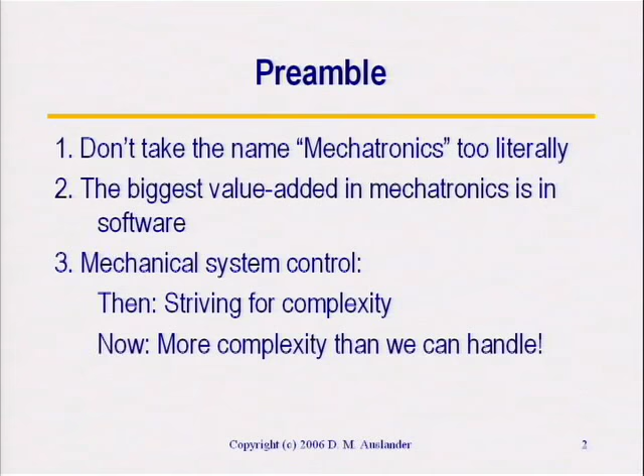So the general theme here is that the value added in mechatronics today is really software. And that's what I'd like to focus on.

If we look at mechanical system control, and I'll give a little history in a moment, in the past the issue was how do you build complexity into mechanical systems. If you look at the present, the issue is how do we manage the complexity we have. So we've gone from scarcity, in some sense, to too much, and that's really the whole issue of how to deal with mechanical systems.

So there's been a long history. Complexity has been something people in mechanical systems have looked for. When I talk about control in mechanical systems, I'm looking at the issue of modulation of power for delivery to a target. So that's what I'm calling a mechanical system: any kind of system in which real physical power has to be delivered to a target.

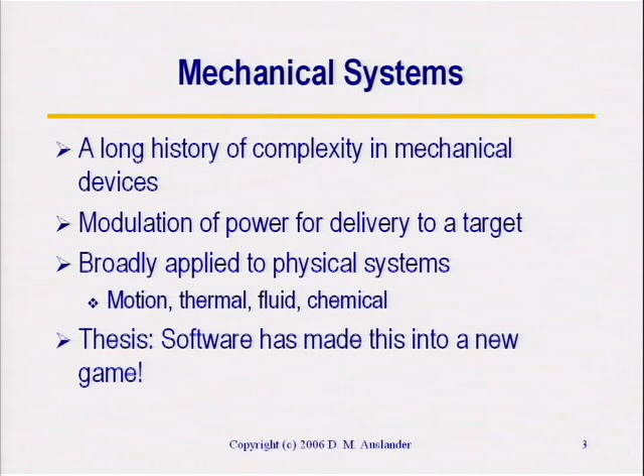People in some other fields might disagree with me, like chemical engineering and such, but I consider all of that to be a mechanical system. So motion systems—when you think of mechanical, you think of motion first—but thermal systems, fluid systems, chemical systems, they all come under this. And the thesis here is that software has made this whole field into an entire new game. It's totally different than what you would look at, say, 25 years ago. It's a completely different field. All the rules have changed, as has the potential.

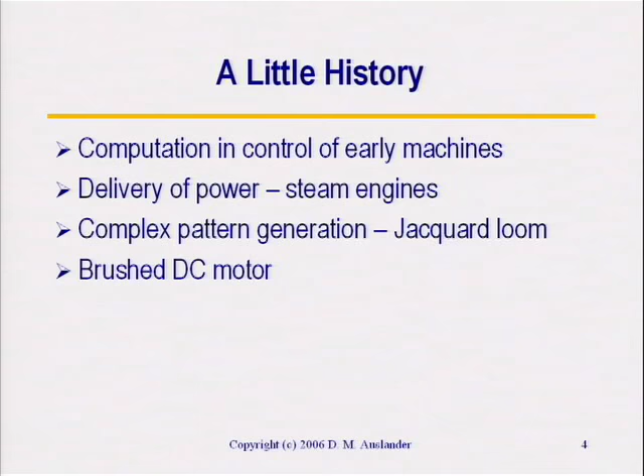So a little bit of history, I think, gives some perspective in terms of this complexity issue and how things work. I'll look at three interesting precedents: steam engines, the Jacquard loom, and the DC motor, just to give a little feeling of complexity, control, computing, and how this was done historically.

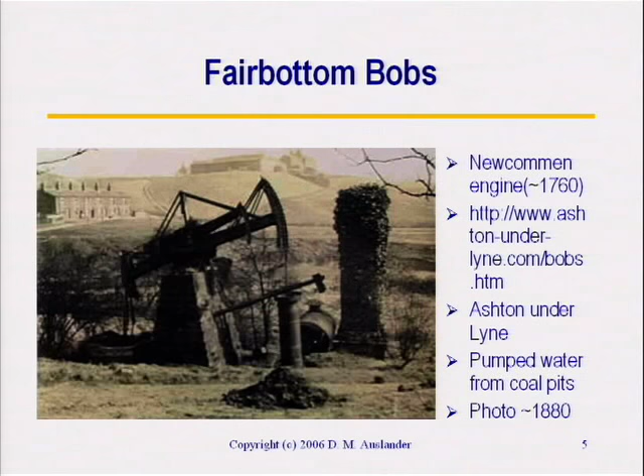This is the remains, as of 1880, of a steam engine that was built in 1760. The purpose of this particular engine was to pump water from coal pits. So you're looking at 18th century technology, and the interesting thing from my perspective is that this is actually early 18th century.

Newcomen invented the steam engine in 1712, a so-called atmospheric steam engine. The way this engine works, you have a chamber, a fire, a boiler, and steam goes into the cylinder. At the appropriate time, you close the valve and squirt cold water in. When you squirt water in, the steam condenses, lowers the pressure in the cylinder, and pulls down the piston, which operates a pump on this side. It's called an atmospheric engine because the pressure difference across the piston can never exceed one atmosphere.

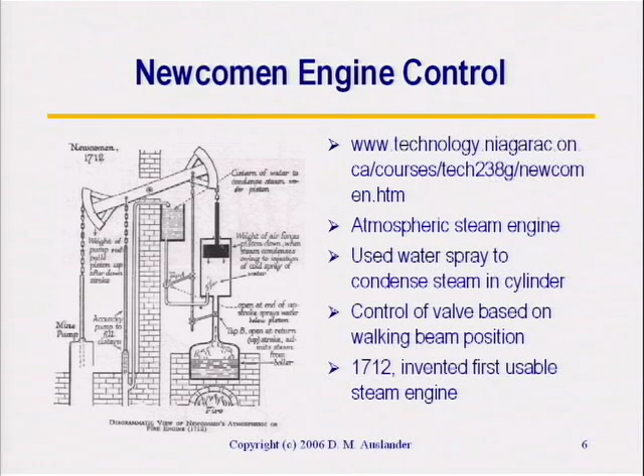What's of interest is this area right here. This is kind of the equivalent of an 18th century FPGA. This is where you built the controls and complexity, and the object of all this mechanical gadgetry is to open and close valves at the right time. You open the steam valve, close the water valve, let the steam in, then close the steam valve and open the water valve, letting the water in for the right amount of time, then close that valve, and that makes the engine run. So you've got a basic system running on what we would call control logic, all built into the mechanical gadgetry that runs the engine.

This is a somewhat later steam engine, a 19th century steam engine that came out of a cotton mill, and at this point is just sitting out in a field someplace. The interesting thing to look at on this engine is right there, the flyball governor. And that gets us into a lot of issues of computation.

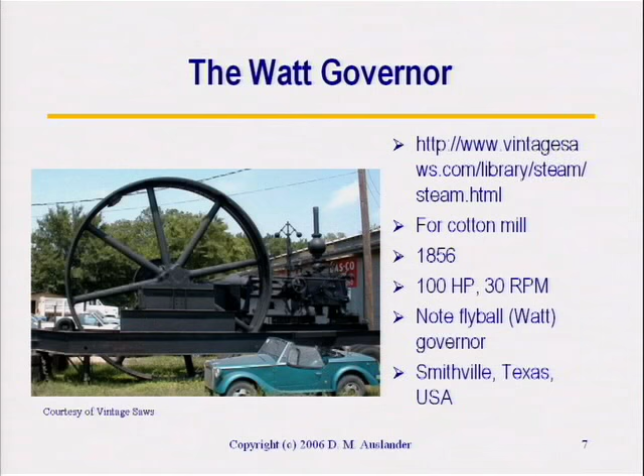I should mention, by way of giving my biases, that I'm in the mechanical engineering department at Berkeley, but I do controls. Controls is my main interest. So if I get a little biased and more interested in the controls part of things, that's why.

If we blow this up a little more, here you see the classical Watt governor. The Watt in Watts comes from James Watt, who was a steam engine manufacturer in England. He invented the Watt governor. This shaft is connected to the main drive shaft of the steam engine. As it spins, these flyballs spin up and down, driven up by centrifugal force. This linkage connects to the steam valve, so as the flyballs go up because the engine speeds up, it closes down the steam valve in order to keep the steam engine at constant speed.

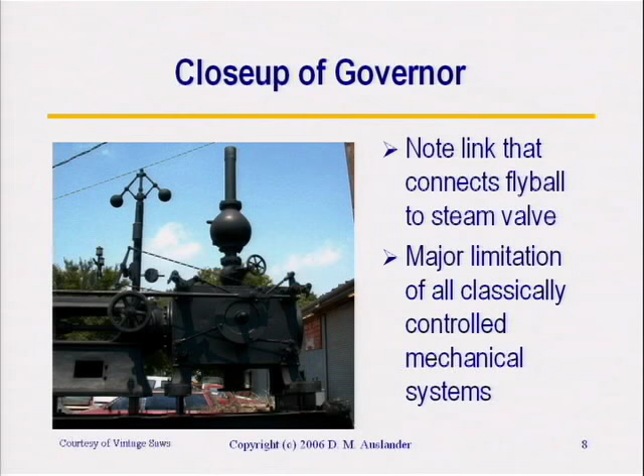Up to pre-computer, pre-electronics days, so the middle of the 20th century, this kind of represents the state of the art in feedback control in mechanical systems. The interesting thing to note and keep in mind here is that power passes from the shaft through the flyballs, through the linkage, and is used to operate the steam valve. That's important to keep in mind as we move forward, that there is a direct power path all the way from the sensing, through the computation, to the actuator, in this case the steam valve.

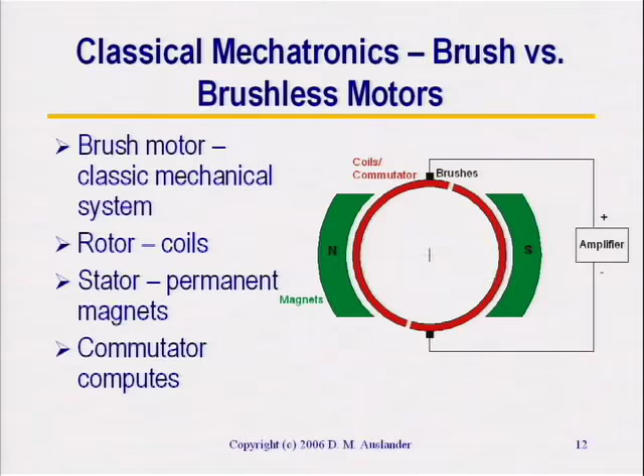And this is the classical brush motor. Millions of them around, still in use. They're all over the place. So still a very common engineering component.

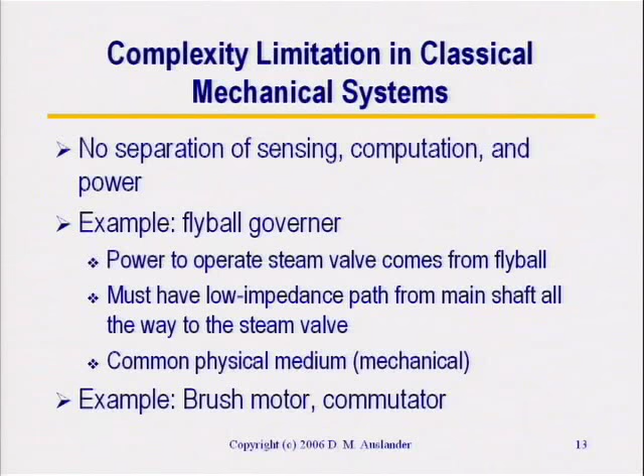Okay, so that gets us to the classical control of mechanical systems. The issue here is no separation of sensing, computation, and power. We've just been through that.

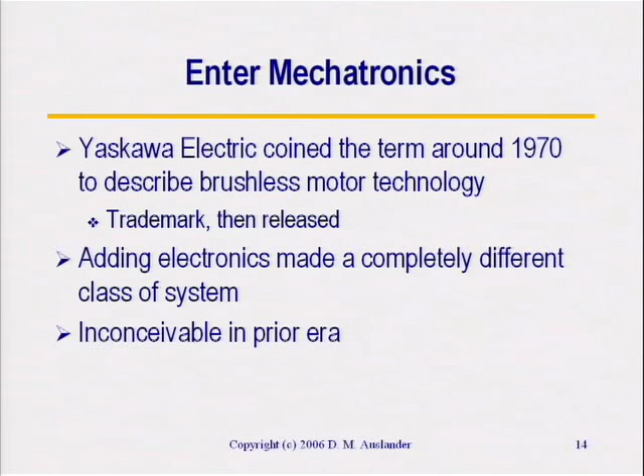That's the issue. In the early 1970s, Yaskawa, dealing with the brushless motor, invented the term mechatronics. The idea was that if you added electronics, you had something totally different than anything you'd had before. So here's a brushless motor.

So what you've done in order to make a brushless motor is separate out sensing, computation, and amplification. And that's, of course, why electronics made the whole control of a mechanical system a completely different animal. Now you're free to optimize to the best of whatever you've got—you can optimize sensing, computation, or amplification using whatever technology is available to you. Whereas in the previous system, you needed a low impedance path all the way through the system in order to transmit power, and so you couldn't do that.

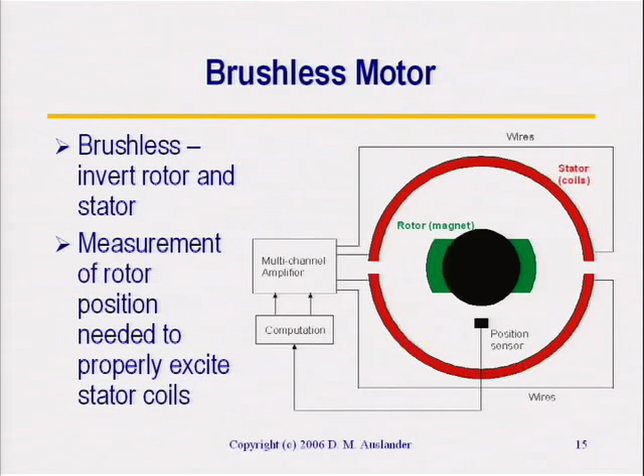Okay, so this motor works exactly the same way. When the position gets to a certain point, you change the current. So nothing has changed, except with the absence of brushes, I can make a motor that in the same space generates a lot more power.

Because the power in the brushed motor is primarily limited by the voltage, and the voltage is limited by sparking on the brushes. If I push the voltage up too high, I'll get more sparking on the brushes. More sparking means they wear out, there's lots of high-frequency RF noise, and the brushes burn up, etc. So you have maintenance problems, and your voltage is very much limited on a DC brushed motor.

Here, your voltage is not limited. Run your voltage up anywhere you want. High-performance motors of this sort in servo systems will often run 200 to 400 volts.

So you can run these at quite high voltage and get a very compact package in terms of the power per unit weight. Okay, so that's the brushless motor.

Then that gets us to what you might call the last third or so of the 20th century. At that point, you add in compact computation. These are a couple of definitions - this is what happens when you let a committee define something. I much prefer for mechatronics a rather simple definition: application of complex decision-making to the control of physical systems. That's kind of what I use for mechatronics. We get there to this kind of decision because of compact computation, small and cheap.

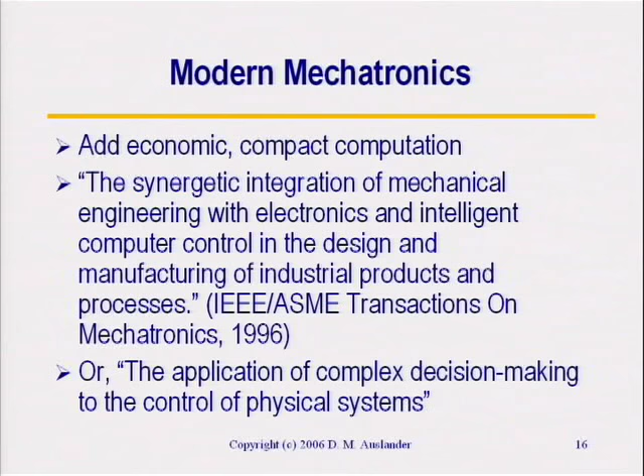So where we go today, control complexity is now limited only by software complexity. Notice how much compute power you want to buy is your only limit in complexity. So that goes back to my first comment that we've now inverted the problem. In the earlier systems, the problem of building complexity into the system was the issue. How you do that was really difficult.

Anybody ever seen the inside of a mechanical calculator? They're wonderful gadgets. Four function calculators were common through the middle of the 20th century. Every office that needed to do computation had them. But it was a device about this big, just absolutely filled with gears and linkages and cams - unbelievable. It worked. That's what the Wright brothers did, by the way. Before they got into the airplane business, the Wright brothers did adding machines.

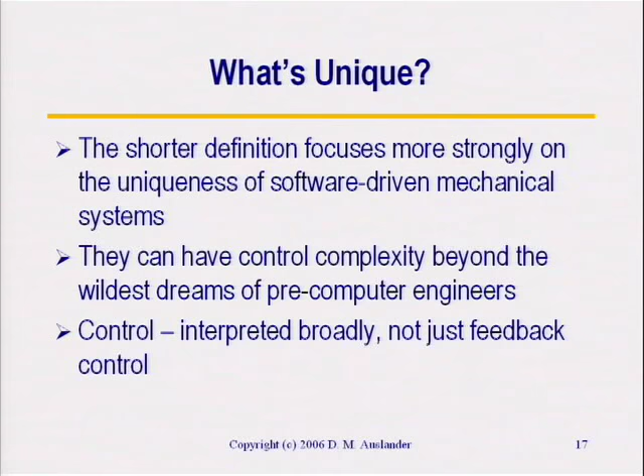Another issue, which I think is less important in this audience, but in most audiences I speak in the academic world - if you say control, people think you're talking about feedback control. Feedback control is of great interest to the academic world because the mathematics are rather complicated and interesting. So control in the academic world usually means feedback control. In this case, I'm interpreting control much more broadly in terms of all the things needed to coordinate the motion of complex machinery. So when I say control, I don't mean just feedback control - I mean control interpreted broadly in terms of machinery.

So if we look at enabling technologies in going from classical mechanical control to modern mechatronics or mechanical control, the first one is amplification. And we are direct descendants of the vacuum tube, basically. The vacuum tube gave us electronic amplification, and we have followed through into solid state, but the idea is basically the same. An interesting side development that really falls into this category that I've never seen anybody follow up on...

...is the pneumatic, particularly the pneumatic controls, anywhere from early part of the 20th century all the way through the 1970s and even into the 80s. If you went into process plants, you'd still see pneumatic controllers. Pneumatic controllers were based on something called a flapper nozzle valve. Turns out if you look at a flapper nozzle valve, it is really a pneumatic operational amplifier. It's really quite an amazing device. And it allowed pneumatic controls to have full independent computation of derivatives and integrals and proportioning.

Is this another word for fluid logic, or would you consider it? No, fluid logic - a flapper nozzle valve is mixed logic. Flapper nozzle valves are rather simple. If you imagine a chamber, pressure, and a little nozzle, and then a flapper - what happens is small motions of this flapper will change the pressure in that chamber. That's the whole basis of a flapper nozzle valve. Fluidics is all fluid, no moving parts. So this is a mixed technology, but way, way earlier than fluidics. Fluidics was a 1960s invention, and this is like 1910 and even earlier.

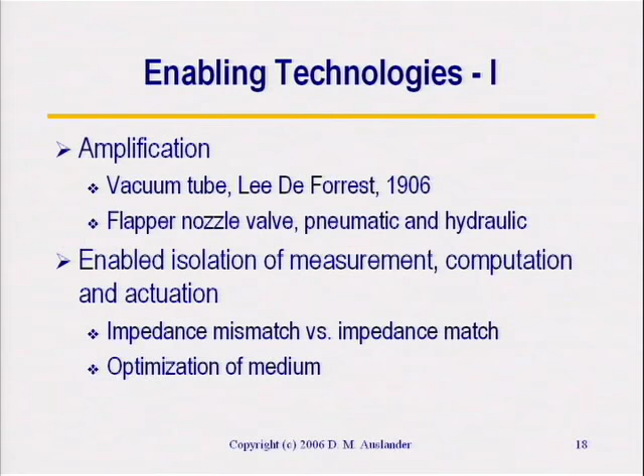So amplification enabled the isolation of measurement, computation, and actuation. What you want to do is mismatch impedance so you do not transmit any more power than you absolutely have to across each of these interfaces.

Then the second is the emergence of software. Originally, software was applied in the process control industry for the very simple reason that they could afford it. You had large, expensive hardware that improved productivity and reliability in that industry tremendously. The kind of computers we're talking about - we had one in my lab when I started at Berkeley, just to give a feeling for what we're looking at. The computer had 18-bit words, it was a PDP-7. At the time, we expanded the memory, which was a big deal. We added 8,000 18-bit words, and the cost for doing that was about $30,000 in 1960s dollars.

So you can see why only the process industry could afford it, but they were willing to spend that kind of money, and it made a big difference.

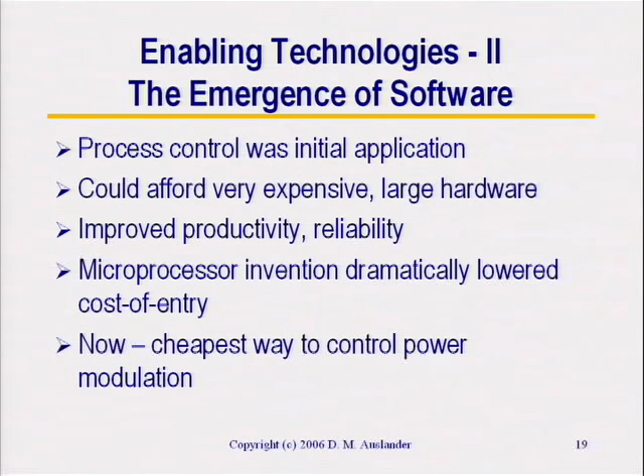The invention of the microprocessor dramatically changed the cost of entry. Now, if you look at the issue, if I have any system in which I'm trying to modulate power, the cheapest way to control it today is with a computer of one sort or another. So this is the least common denominator. If you want to control the modulation of power, the only time you normally find that kind of computation being done in something other than a computer is where you have speed limitations. So you go to either analog or FPGA.

Real-time software is the key to mechanical system control. If we look at the general notion of software, the magic of software is it's exactly reproducible. If I run a program once and run it again, I get the same answer.

This, interestingly, really from the perspective of people brought up in the world of analog systems, is magic. You have a system in which there is no error propagation. With no error propagation, there's no complexity limit. And this is true magic.

If you're brought up in the computational world, anybody here know what an analog computer is? Okay, a few, that's more than I get most places. If you're brought up in the world of analog computing, analog computing complexity is ultimately limited by signal-to-noise ratio. In other words, if you're willing to spend enough to keep the signal-to-noise ratio high, or noise-to-signal low, keep the noise down, you spend a lot of money. Ultimately, though, that noise will propagate everywhere, and if you go too far, you're going to get nothing but noise.

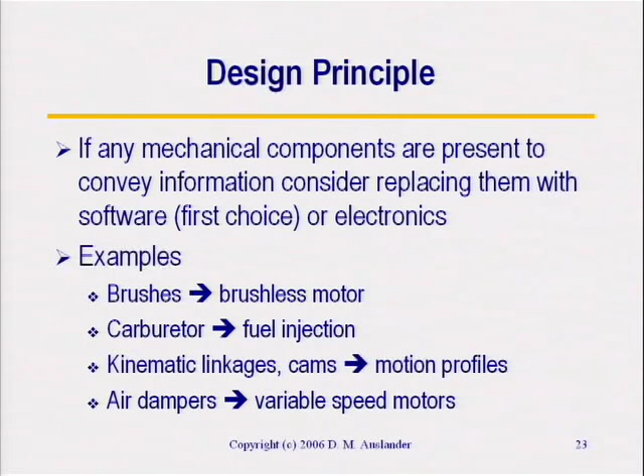In order to do design, you need a context. And so the context that I deal in and the one I look at is what I call the unit machine. The unit machine establishes a domain of applicability — it tells you what your design methodology is applicable to.

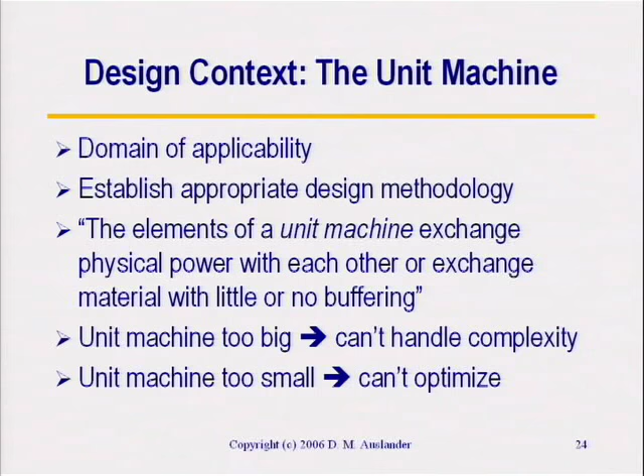The definition is that the elements of a unit machine either directly exchange physical power or exchange material with little or no buffering. That represents what I call a unit machine. The basic design issue is, if you select your unit machine too big, you end up having trouble handling the complexity. If you select it too small, you can't optimize because you've modularized too much and can't do global optimization. So a fundamental design decision in any system is, what's my unit machine?

When I design the mechanical system, designing the unit machine is important. One of the reasons a lot of systems fail is that the machine design and the control are done as if they had nothing to do with each other — some designer will design a machine and then say, okay, you control guys, now control it. If this decision is made badly, the machine either will perform badly or unreliably because the unit machine was selected too large and you never could get a handle on it, or it will not perform well enough because you couldn't optimize it.

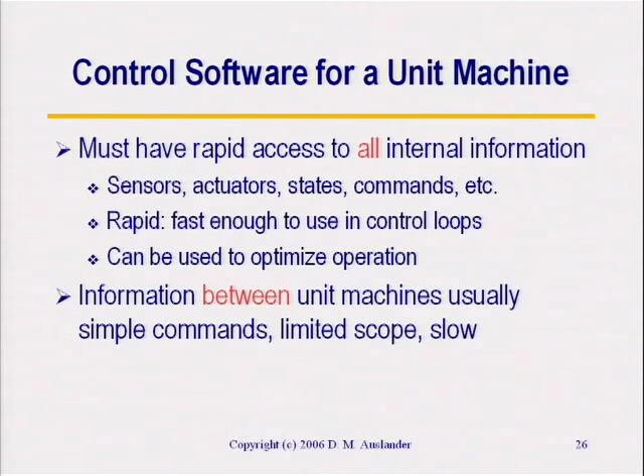A couple of examples - there's the wafer handling robot, and the Denver airport fiasco is a good example of defining the unit machine too big. The design for the Denver airport, when it was built - about 15 years ago - the baggage handling was going to be completely automated. You'd put a barcoded piece of baggage from the clerk onto the conveyor, and it was never touched again until it got to the right airplane.

But this entire system, from what I can tell - I was not inside this system, but from what I can tell - this entire thing was viewed as a unit machine. And it never worked. It would fling baggage out because the carts were going too fast, and the baggage would end up in the wrong place, and the carts would end up all focused on one end when you needed them on another. There were just no end to problems. It never worked. It cost the airport something like a year or a year and a half late opening, which cost them something in the order of $1 to $2 billion because of that error. The baggage handling systems were basically ripped out and converted. When they finally opened the airport, United Airlines was having people carry baggage from the check-in to the airplane. This was a good example of a unit machine being defined incorrectly.

So you have two examples: one where the unit machine was defined too small, and you get some really nice low-hanging fruit in terms of improving performance. The other where it was defined too big, and you get a total disaster - the system never worked. These are extremes, of course. In the middle, things are a little more moderate, but the same general problems apply.

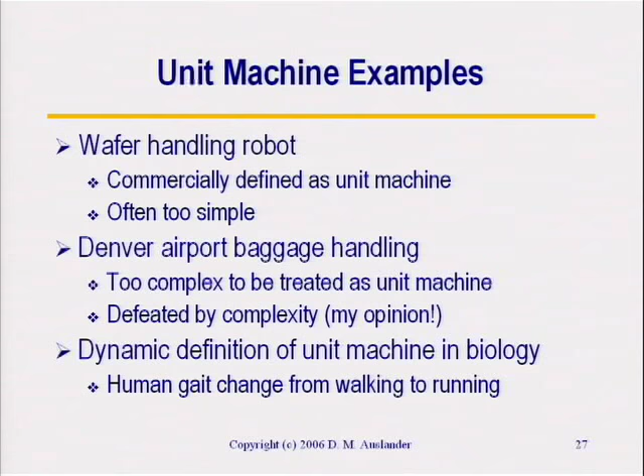Another interesting issue is the dynamic definition of a unit machine when you go from walking to running. Again, this is conjecture - I'm not sure it works this way, but I think it does. When you walk, your whole body is a unit machine - you can freeze, you can stop, you know where all your joints are. I won't demonstrate, but when you run, you can't do that. I think the unit machine for running is the legs, and then you separate navigation of the body from control of the legs.

Typically when you're running, if you find some unexpected change in the grade, you really can't correct it until the next step. So again, conjecture - I think you've got a dynamic change in what the unit machine is to account for the difference in speed. You simply can't compute in the human brain fast enough to keep track of running, but you can for walking. You're using your arms dynamically while you're running for balance.

Repeat the question - yeah, you're using your arms for dynamic balance in running, and that's absolutely true, within each stride. But if you look at that again, I'm not an expert, I'm just conjecturing on this one, that what you're looking at is within-stride pre-programmed behavior, and what changes is stride to stride. That's a unit machine issue. It seems to me there's some counterexamples if you watch...

Athletes play ball or whatever they're doing, but I don't want to have an argument. It would appear that they're controlling the whole torso, not just responding to real-time things happening as quickly as much less than a step interval. But I don't want to argue, but it seems like... No, I will not argue at all.

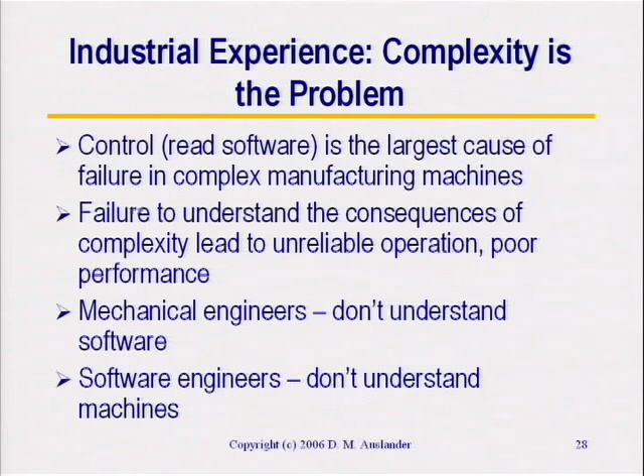Okay, so what I'll describe briefly here is how I deal with this. This is basically how Berkeley Process Control designs its machines and how I teach design of machines. We need some way of describing control. We need a design language. We need to be able to design and document. We need a communication vehicle among all stakeholders - not only people like us who understand C, Java, or what have you, but also people in manufacturing who are going to make this thing, people in marketing who are going to sell it, people in maintenance who are going to fix it. Generally, I don't care what language you're using, it's unreadable. Code is not readable by anybody, often not even by the person who created it. So you need some language that's an abstraction layer above code to deal with.

We use a fairly simple design model based on tasks and state machines. There's no real good definition for tasks beyond the dictionary definition - a well-defined responsibility is a task. This kind of two-layer model is suitable for the unit machine we're talking about, but not suitable for a much more complex system - you need more layers.

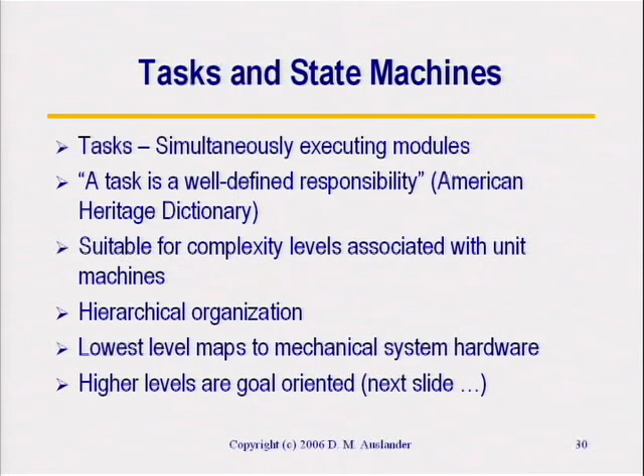This structure serves for organization, system organization. It tells you what you're doing. In the network sense, it allows you to look at these layers independently, put them together, and work on them with different teams to some extent.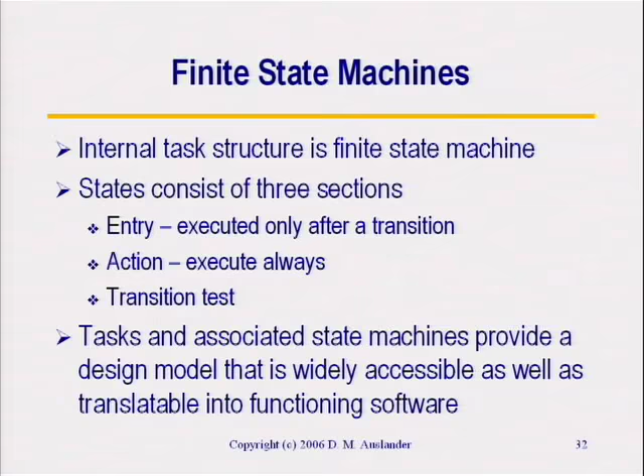Portability is important because of the development stages of a machine. You start off talking about a machine that is some kind of prototype, sitting on a bench with wires in all directions and motors hanging out, and some PC sitting there running the machine. When you finally get into production, you've got some embedded processor that is many, many generations removed from the PC.

The other issue is the life cycle of a mechanical product, anywhere from 5 to 20 years. Whatever car you're driving, the base engine in that car could be as old as 20 years. What's been changing on it is the controls and how it's operated. So you have to be able to take a basic machine and compare that to the processor generation time of about 18 months, and be able to update that machine every 18 months or so.

Typically, you update. Berkeley Process Control is a good example of the controller they use as the core for all their products. I don't think in any generation they've ever even used a processor from the same manufacturer, going from one generation to another. Yet all of that software has to be ported along.